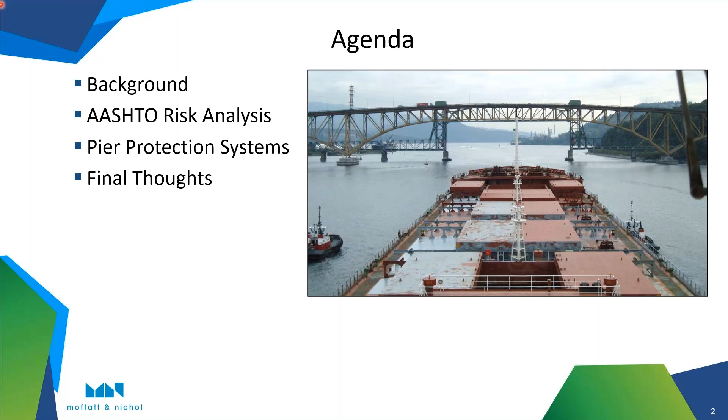Thank you very much, Mike Winters, and I appreciate the opportunity to speak to this group. Today we're going to give a basic overview of the AASHTO vessel collision risk analysis, but we're also going to spend some time talking about pier protection systems and the types of protection systems that might be appropriate. We'll look at some background of vessel collision, get a little into risk analysis, but not too deep, just to give an overview. We'll talk about pier protection systems, and then we have some final thoughts. This presentation has almost 40 slides, and we're not going to cover every slide in detail. Afterwards you can download a PDF of this presentation and look up things we won't have time to get into, but we do want to hit a few highlights.

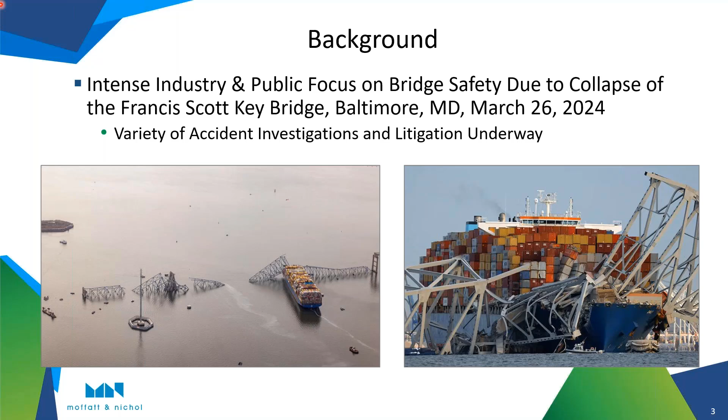The recent collapse of the Key Bridge in Baltimore has brought a lot of industry and public focus on bridge safety, and there are a variety of accident investigations and litigation underway. Accidents do happen, it's only a matter of time. I often say, if you build it, it will be hit. You put an object in the water, be it a bridge pier, a terminal port facility, or a pole, at some point in the lifetime of that structure, due to whatever circumstances, it's probably going to be hit. Bridge collapses have obvious consequences: people die, oil spills occur, political turmoil where people lose their jobs and governments can be turned around, major transportation disruptions, and large economic losses. The largest of these losses are usually the motorist inconvenience costs, where motorists have to take a detour for the years it takes to replace a bridge, and if you detour 50, 100,000 cars a day, that adds up. Of the collapses that have occurred since the early 1960s, about half of them are in the US.

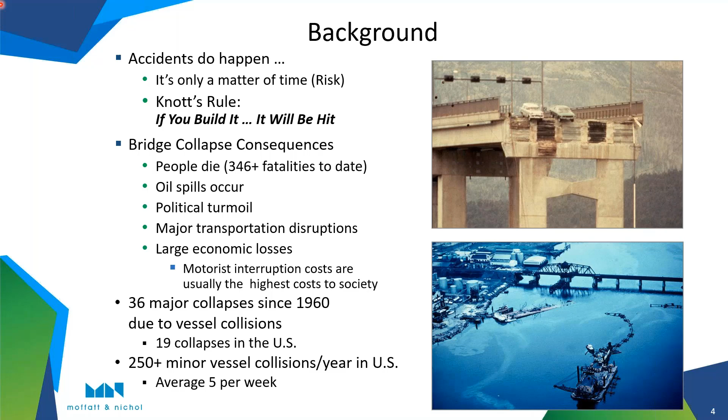Just to note that on average, we have about 5 collisions per week of a minor nature. They do some damage, but not significant, and not leading to collapse.

Why do vessels get in trouble? There's a variety of reasons. The highest reason is human or pilot error, depending on which statistics you follow, 60 to 85%. The things I list on this slide are not exhaustive; there are a bunch of factors. One is that most international vessels have international crews, and not all speak excellent English, so sometimes there can be misunderstandings between a local pilot and a command that's not quite understood.

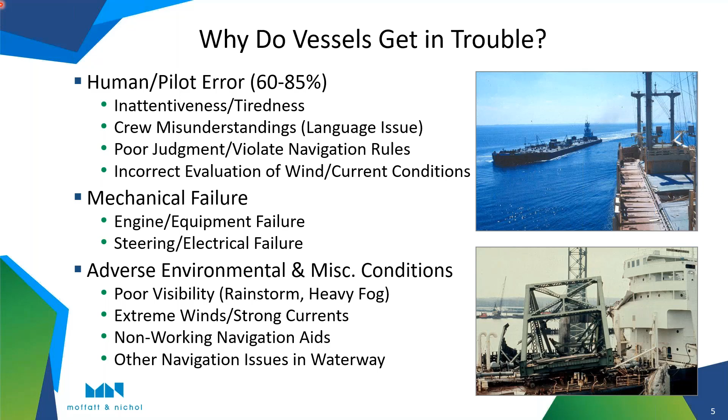There can be mechanical failure. This is obviously something that happened on the Key Bridge. In most circumstances, there tends to be some kind of adverse environmental component, like heavy fog, a rainstorm, or strong winds.

These collapses occur everywhere, on inland waterways and coastal waterways. Though we're talking maybe more with a focus on ships, we have many more bridges in our inland waterway system that are subject to barge impact, and we've had a number of bridges collapse due to barge collision. In the lower left of this slide is a railroad bridge where a barge hit it. A train passing a few moments later went into the river near Mobile, Alabama, and a number of people were killed.

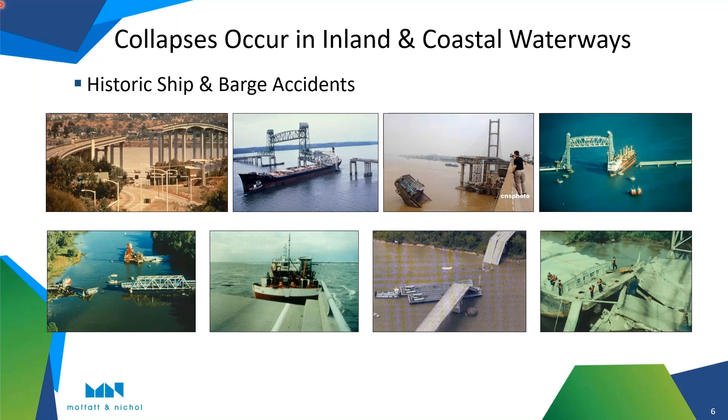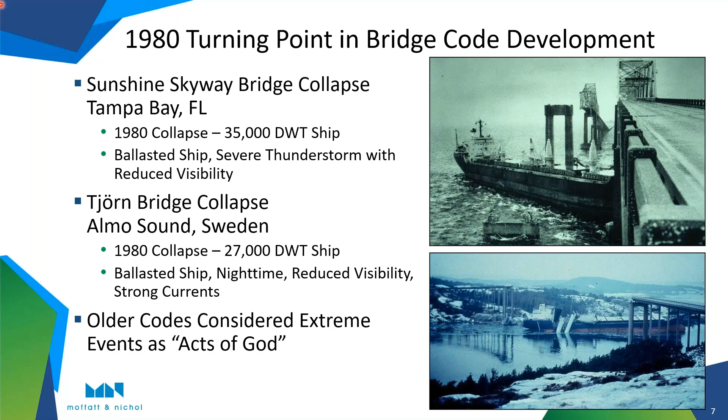Prior to the 80s, the older codes considered these extreme events as acts of God. In 1988, there was a pool fund research project sponsored by 11 states and the Federal Highway Administration. I had the great privilege of being the principal investigator of that study. It included consultants from Denmark, Ole Damgaard Larsen from COWI Consult; Professor Gerhard Woisin, a noted naval architect in Germany specialized in ship collision; and Dr. Fujii from Japan, along with some of the risk analysis work he was doing there.

The result of this research project was, in 1991, the adoption of the AASHTO Bridge Guide Specification for Vessel Collision. That code was used for 18 years, and then in 2009 a second edition was issued with some minor revisions and updates. The guide specification has since been superseded by the AASHTO Bridge Design Specifications, what I'll call the code itself. The guide specification had over 240 pages of vessel collision analysis and design information, background, and worked examples, and that was all condensed into 20 pages in the code. So if you just read the code, you'll have what I think of as a limited understanding of vessel collision. This second edition is really a critical reference when using and understanding the code provisions.

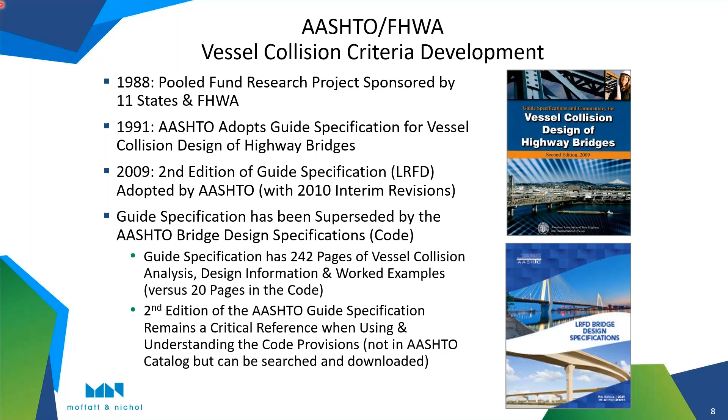AASHTO had moved it into their archives section but have recently brought it back out. It is available now in AASHTO publications. It's not in their catalog, but if you go to AASHTO publications online and search vessel collision, you can purchase the second edition of the guide specification.

A quick overview: this was the first time risk analysis was used to determine the design condition for bridges. We use the procedure to estimate the probability of bridge collapse, compare that to a standard, and then do something to bring the bridge into compliance with that standard. Part of the vessel collision risk analysis is we select a design vessel associated with each pier in the waterway. It could be a different design vessel as the piers are further away and in shallower water, and there could be a different design vessel inbound than outbound, which is sometimes the case for river situations.

For critical bridges, the risk of collapse is 1 in 10,000. For non-critical bridges, it's 1 in 1,000. This does not mean we expect bridges to last 10,000 years or 1,000 years, just that the risk of vessel collision and collapse of that bridge within its lifetime is vanishingly small. The code has some simplified examples of the principles of how to do vessel collision analysis, but these simplified situations are rarely real world. In the real world, we have curved navigation channels, side channels, and other geometries, so these basic principles need to be adapted for the local circumstance.

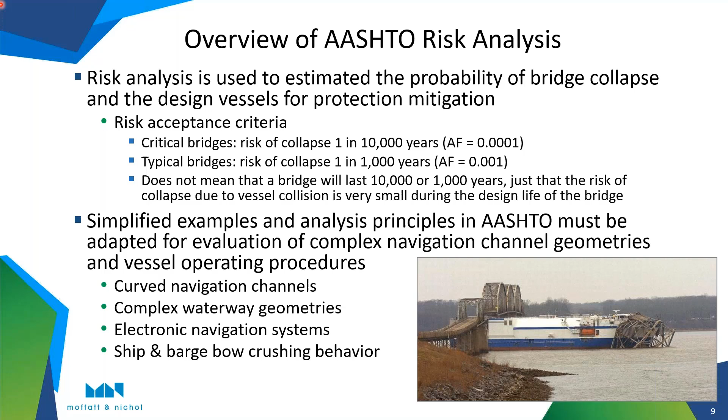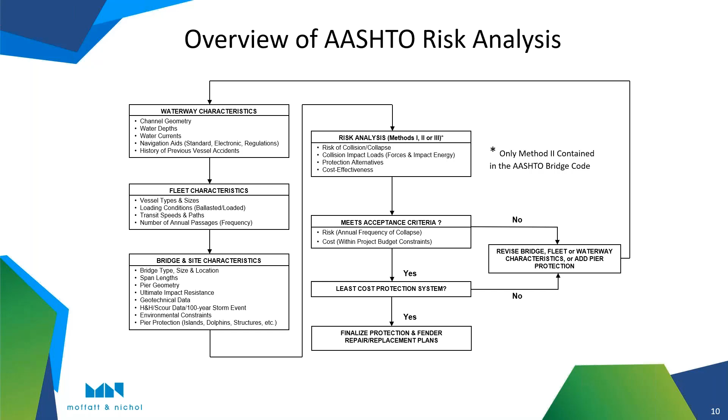This includes an accident base rate based on historical information. There's a geometric probability that says, well, if the vessel goes off course—is aberrant—where is it? This geometric probability is not the distribution of vessels that are in the channel. We'll talk about AIS here in a moment, which gives us information on the thousands of vessels transiting the channel, and one can do all kinds of statistical work on that information, but that gives you the vessels that are in the channel.

This geometric probability is about the rogue vessel—the one in fifty thousand transit vessel that's off course—and we're asking the question, where is it? That's what this geometric probability attempts to do.

We do a probability of collapse—so if the bridge is hit, will it collapse? Sometimes it's a minor collision and it won't. Sometimes it's a big collision and it will. There's a protection factor: are there things upstream, downstream, or protection structures to protect the bridge? We have to make estimates of what that is. And then there's a growth factor—are more or fewer vessels expected to transit this channel in the future? We typically take the analysis to the midlife of the bridge in question.

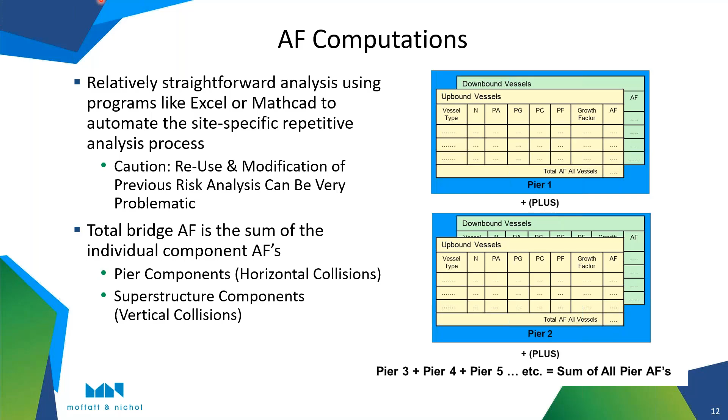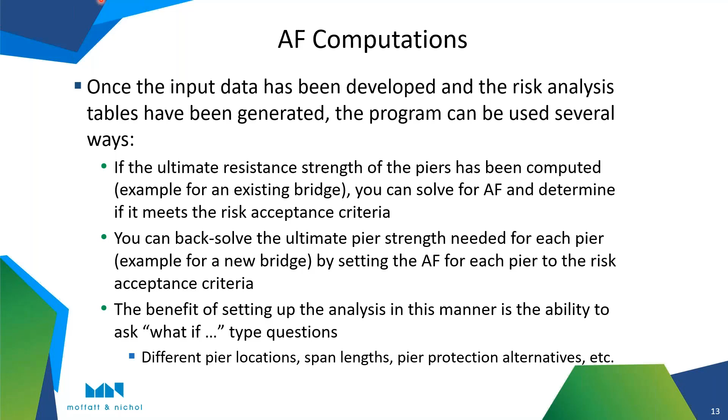The benefit of setting things up this way is that it allows us to do a lot of what-if scenarios, look at different pier locations, span lengths for new bridges, and what types of pier protection alternatives might work.

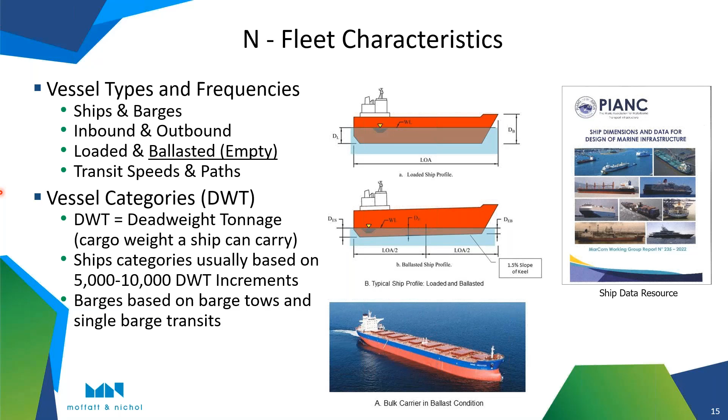Mike mentioned previously the AIS vessel tracking. AIS is automatic identification system data. All large commercial vessels are required to have this. It's downloadable information, but it does require some specialized post-processing software to work with.

Also going into the annual number of vessel trips, there are things we have to account for. Mike mentioned earlier about the equations that go into the annual frequency of collapse. One of those is the growth factor. It accounts for either an increase or a decrease in the annual number of vessel trips, and typically we'll transition this to the midlife of the bridge structure.

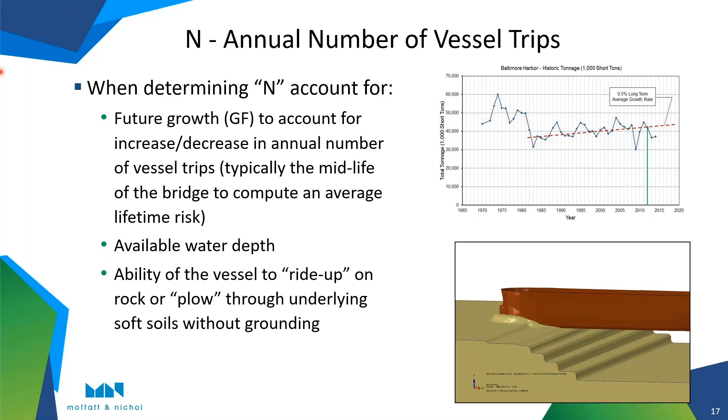Some of the other factors considered in the risk analysis for the annual frequency of collapse are the geometric probability and the probability of aberrancy. As Mike said, the code shows you what to do for very simplistic models of a bridge crossing a waterway at almost 90 degrees. This is obviously not a 90-degree crossing.

So the way we do this is we look at the vessel transit path. We've got the inbound and the outbound, but on the inbound side there was a severe curve. So what we did was break the curve up into legs, or tangent sections, and applied an individual risk to each one. What you're looking at here, the standard deviation, is the geometric probability for each one of these legs.

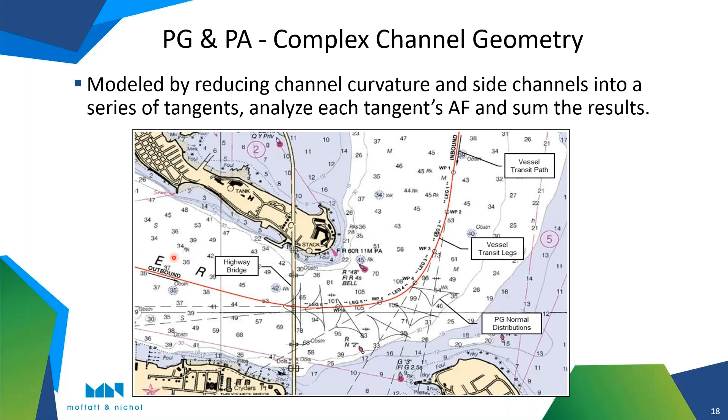One thing to note in the code: for the probability of aberrancy, Mike mentioned there is an aberrancy base rate. Just know that the base rate in the code is for a singular direction, meaning that same base rate applies to both inbound and outbound. It would be incorrect to take that base rate and divide it by 2, half for inbound and half for outbound.

The probability of aberrancy goes back quite a ways. The code was originally written in 1991, which means the data that went into developing it probably comes from the 70s and 80s. The aberrancy base rate used in the probability of aberrancy was based on one pilot on board, no other navigation restrictions, and no tug assistance.

So certainly with the advent of today's modern technology, adjustments to the base rate and modification factors to decrease it can be developed to account for the types of vessels and specific navigation channel requirements and restrictions, such as multiple pilots, tug assistance, and if tug assistance, multiple tugs, daytime travel restrictions, visibility restrictions, current restrictions, speed restrictions, among others.

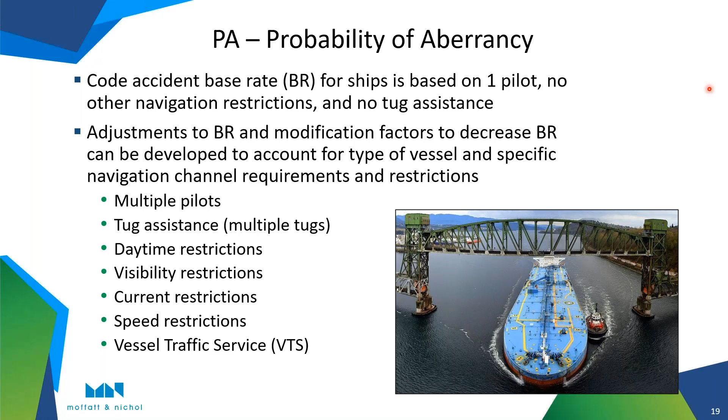One of the major components to both the impact loads and energies is the impact speed. The way we do that is we look at the actual vessel transit path. In this example, directly from the code, this is two-way traffic, so we're not considering the centerline of the channel. We actually have to consider the centerline of the vessel transit path.

What we start out with is VT, the transit speed in the channel that we've calculated. Once we get to the edge of the channel, there's a linear reduction in speed all the way out to 3 times the length of the vessel. So XL is 3 times LOA.

Once it gets to that point in time, we assume the vessel is basically just coasting in the water, so it's the speed of the waterway on which the vessel is traveling. Obviously each one of these curves is different for each vessel because they all have differing LOAs, so it's a different curve that needs to be included in the analysis.

The ideal situation, looking at this chart and knowing how speed impacts both force and energy, is a long span over a narrow channel, because it pushes your piers out into both shallower water and reduces the speed. The problem situation is when you have a small span over a wide channel, so you have piers located relatively close to the edge of the channel because the speed hasn't reduced at that point in time.

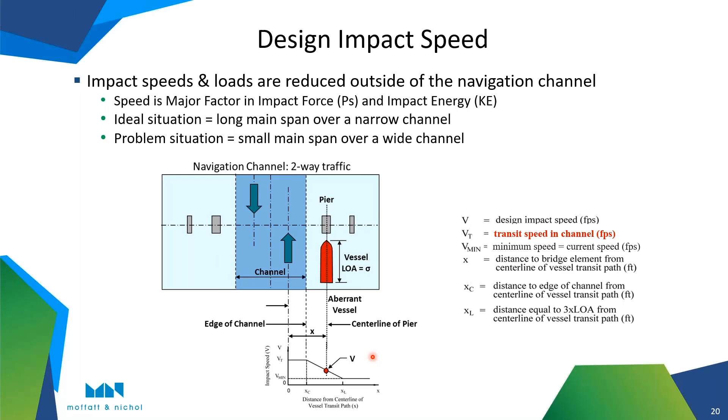The AASHTO impact load: now we've run our analysis, and from there we're able to determine what the impact force and impact energy are. It's important to note that you must consider both the force and the energy, not just a force applied to a bridge pier. I equate this to designing a beam that works for moment capacity and shear capacity, but then it deflects too much — you haven't accounted for all the code requirements.

So it's more than just determining a force and applying it to the bridge. You have to make sure the energy has been absorbed as well, because the ship is only stopped when the impact energy has been absorbed, either by the ship, the bridge, or the hydrodynamic mass of water. The energy is absorbed by moving that force through some distance.

If the bridge pier is a rigid vertical wall, then the energy is absorbed almost primarily by the vessel — there's crushing of the vessel. But if the vessel bow is only partially crushed and all the energy is not absorbed, then can the bridge pier move substantially without collapsing? Can it handle that load and the distance required to dissipate that energy?

For example, just an order of magnitude: for a 100,000 DWT ship impacting at 10 knots, which is not unreasonable at some coastal ports and bridges, the equivalent static force would be about 43,000 kips, and the impact energy is over 1 million kip feet. The bow crushing distance per the code, based on that same ship hitting a rigid wall, would be about 40 feet — so the bow of the vessel would crush 40 feet.

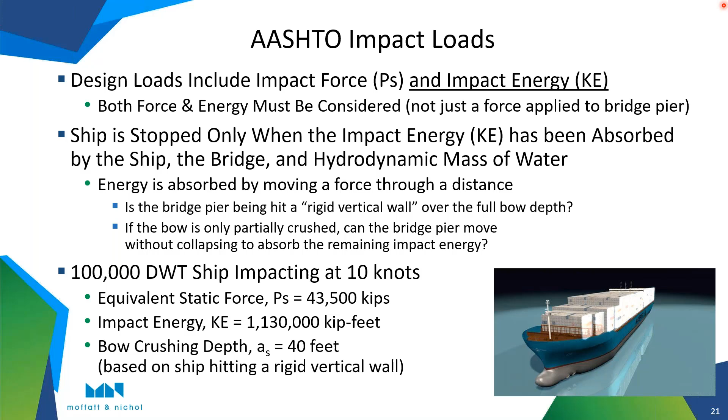The location of impact forces is critical.

We have to consider that the bridge design for vessel collision must account for the barge bow, the flare overhang up top, and anything protruding below. The barge can hang over a column footing and possibly contact a column.

Looking down in the lower left, this is a container ship. It's actually in a lock, but you can see this dramatic overhang of the bow, where that portion might hit before the bow itself would hit.

The middle picture shows a cruise ship where the bow could impact a column well before the bulbous bow portion would impact the pier below. And then we have the Francis Scott Key Bridge collapse shown here, where it appears that bow overhang had clipped the column and taken it down.

This is what happened at the Sunshine Skyway Bridge in Tampa, Florida in 1980. The bow overhang actually did clip the column and took out that approach span.

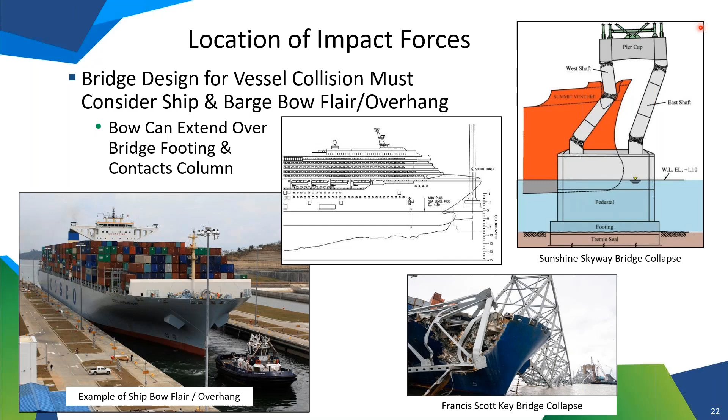Location of impact forces, continuing. The vessel collision must consider the bow shape, the overhang above the waterline contacting the column, the bulbous bow below contacting critical bridge piling or foundations, and the crushing of the bow and any crushing of sacrificial fender elements.

It affects the foundation geometry. What we're looking at in the bottom right is just an example of a bridge foundation with the support piles and then the columns.

This structure has an overhanging pier protection sacrificial element mounted to the pier foundation, and as the vessel collapses, it's actually able to take out the sacrificial piles.

But what you want to make sure you consider is that the impact energy absorbed and crushed by the vessel doesn't allow the bow to impact the critical support piles for the foundation. We also want to ensure there's sufficient overhang so the bow itself, the deck level, doesn't impact the column.

I've had questions in previous presentations about whether the ship really slices through like this, and the answer is yes. This was a container vessel that actually hit a port facility, and you can see where it crushed right through the edge of that deck, exactly as we're showing it.

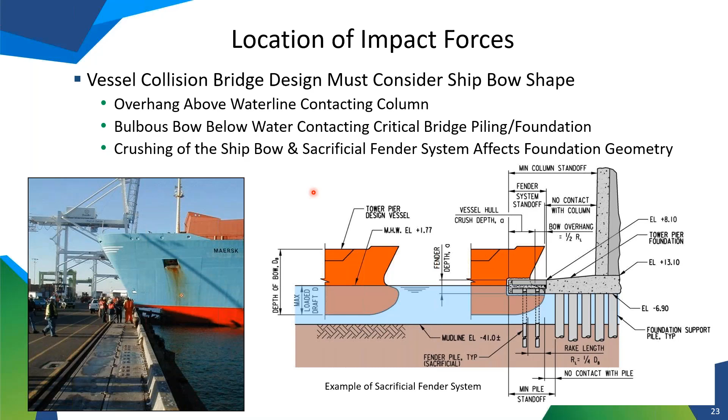Some of the things we can do involve finite element modeling of vessel impact. It's a complex problem, nonlinear dynamic modeling of both the impact and ship grounding. As such, we use an explicit solver FEM modeling for this.

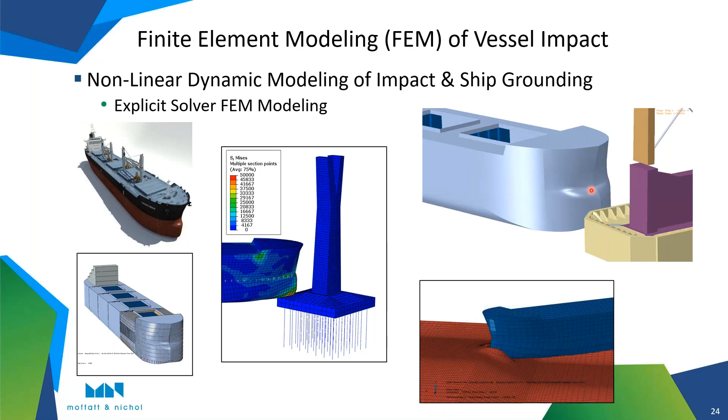Now I'm going to talk about a couple of typical pier protection alternatives. For bridges controlled by ship collision, we're typically looking at dolphin structures - large diameter steel sheet pile cellular cofferdams, typically a sacrificial element. We're also looking at protection islands and pile supported structures, which are typically sacrificial as well.

For bridges controlled by barge collision, we can design piers for impact forces, meaning you don't need anything in addition to the pier itself, since impact loads and energies are typically much less for barges than for ships, so the pier can be designed to handle that. We can also design fender systems both elastically and sacrificially, and dolphin structures as elastic and sacrificial.

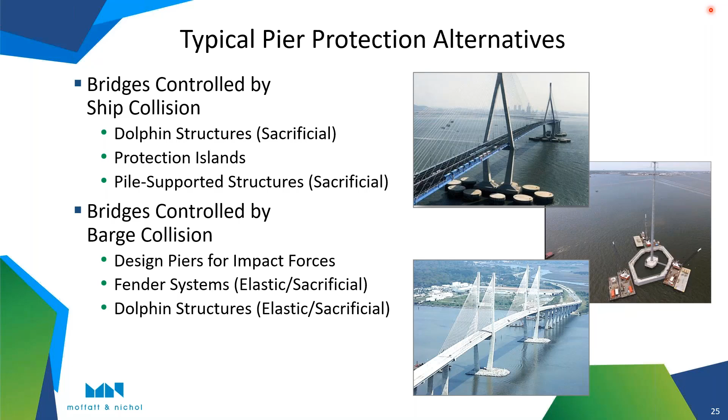For the dolphin structures, as mentioned, they're typically large diameter, 40 to 100 foot steel sheet pile cofferdams, heavily reinforced concrete caps, filled with sand or gravel. They're typically sacrificial - the kinetic energy is absorbed by the ship crushing, and then the dolphin partial and/or full collapse.

We're looking at a couple of examples here: the Dame Point Bridge in Florida, where we've got the dolphins on the approach, and the Incheon Bridge in South Korea, where it's surrounded completely by cellular coffer cells.

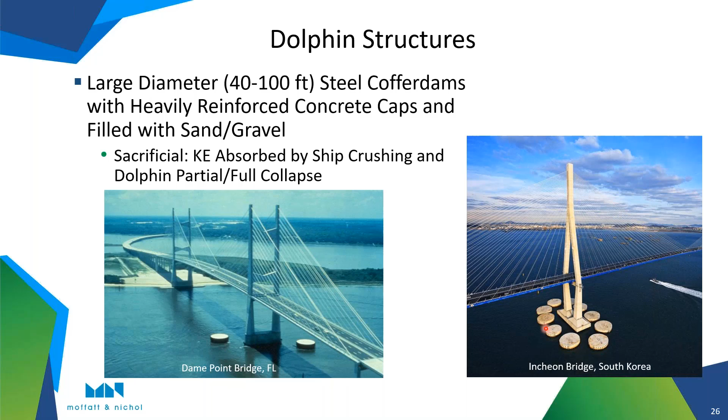For the dolphin structures, the impact energy is absorbed by either the crushing of the vessel bow, the lifting of the vessel bow, the friction between the vessel and the dolphin, the friction between the vessel and the bay bottom, sliding of the dolphin, rotation of the dolphin, and deformation of the dolphin.

This is something a lot of structural engineers find a little difficult to wrap their minds around. We're typically designing things in either the elastic or the plastic range, but the purpose of these dolphins is as a sacrificial element. So if they're hit by the design vessel doing the design speed, the intent is for them to be completely demolished, and they would need to be replaced after the incident. But certainly the replacement of a dolphin type structure is much less than the replacement of the bridge. Designing something to collapse and fail is sometimes a foreign concept for structural engineers. Ultimately, the structure needs to hold together for about 3 to 4 seconds.

How we do that is typically by putting a heavily reinforced concrete cap on top. One thing I do recommend is that the concrete cap have physical attachment, to make sure it's not just kind of sitting in and self-weighting in. I have seen examples where the original design had an embedment of the steel sheet piles up into the cap. However, the contractor found it would be difficult to build, so they asked if they could just build it inside of, and they did. Then when it was hit by a vessel, this large diameter, very thick concrete cap just basically flipped out onto the sand bottom of the waterway floor there.

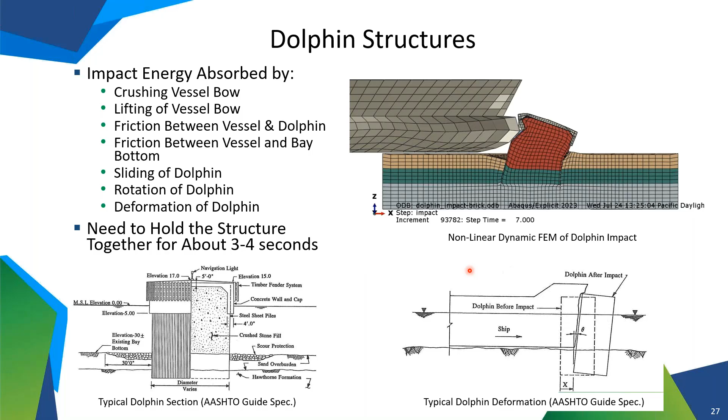The next to discuss is island protection. Island protection would be considered the best protection when it's environmentally feasible. The problem with this type of measure is that, especially in U.S. waterways, islands typically cover a large area of waterway bottom, and that can become a problem with environmental permitting. So they do operate the best, but the environmental permits to obtain can certainly be a challenge.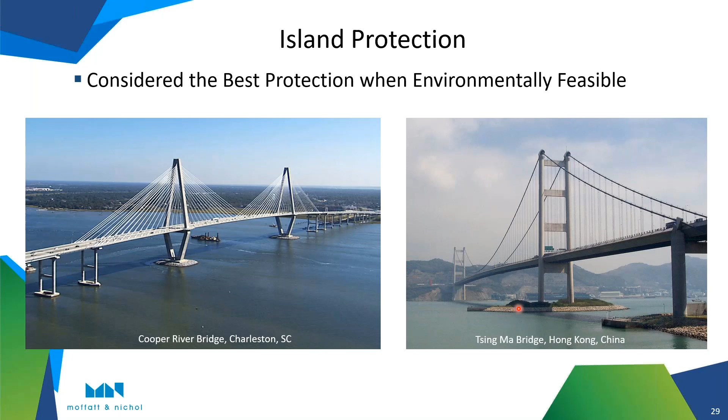For the island protection, the impact energy is absorbed by the grounding of the vessel. Once again, you have the lifting of the vessel's center of gravity. You can have crushing of the vessel hull, although it's usually minimized. There is a generation of water waves and turbulence and hydrodynamic mass movement. There's displacement, shear, compaction, and crushing of the island material. So it does damage, and there are usually generations of shock waves in the islands that can be transposed onto the pier foundations. The islands do the least amount of damage to the vessel, and as such, they have minimal risk of oil spills. So they can be more environmentally friendly on that side of the equation, and they're usually easily repaired after an impact or grounding.

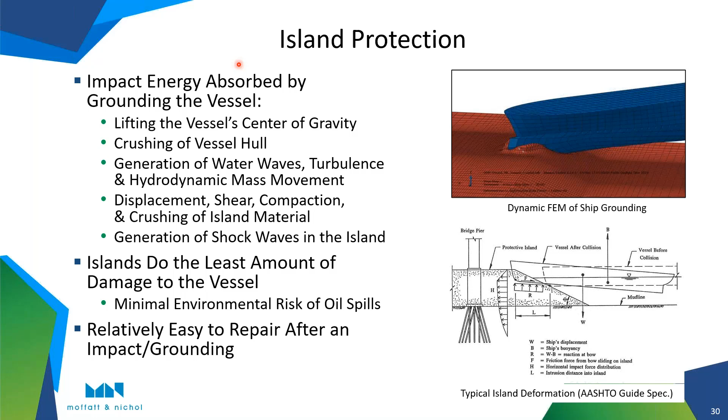For those that have ever driven down a large highway through the mountains and have seen the runaway truck ramps, I typically liken an island to that type of philosophy. You're trying to create something that's going to be somewhat of a softer impact.

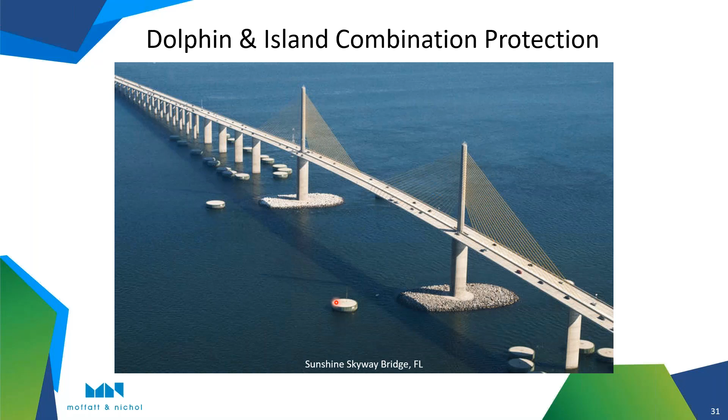You can actually do a combination of different types of structures. You can have dolphin and island combinations. Here's the Sunshine Skyway Bridge in Tampa, Florida, which has both the cellular coffer cells and an island. An interesting story about this bridge is that the day the replacement bridge opened, there was a fishing trawler that actually hit one of these and sank a few minutes later. Turned out that both the captain and his crew were in back tending lines, and they had the vessel on autopilot, but it was hit almost immediately after - small vessel, but hit immediately after being put in service.

The last type is the pile supported type structure. These can be done in two ways. What's shown here on this bridge in Argentina is actually a separate type structure - it's separated, a pile supported structure that's separated from the bridge pier.

If the bridge pier is substantial enough and can handle the lateral loads, you could certainly mount it to the bridge pier, although it's less desirable because there's a lot more geometry involved, making sure that the deck and the bow do not contact critical members of the bridge.

You'll note that on this bridge there are larger structures on one side versus the other. This is because it's on a river, and the river currents flow in one direction only. So vessels transit faster in that direction than they do going against the current, hence the difference in size of the two types of structures.

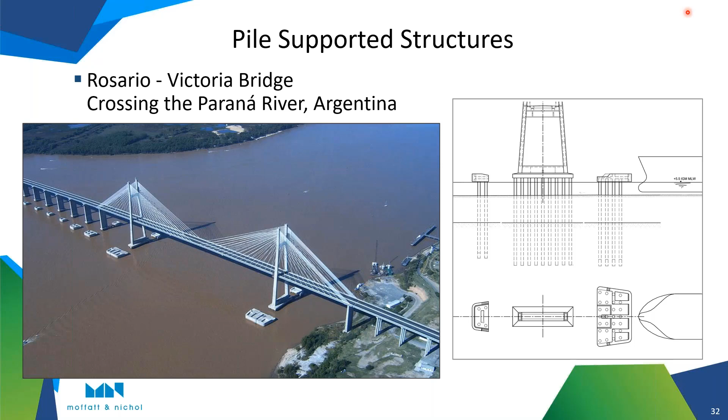This is a pile supported structure, actually right adjacent to the Francis Scott Key. Mike and I worked on the vessel collision risk analysis for this. It's the BG&E 230 kV crossing, a high tension power line crossing. It had a 2,200 foot main span, and was designed with a sacrificial pile support ring, put in place to crush if something were to go awry, protecting the foundation structure for the towers themselves.

With the 2,200 foot main span, we were able to locate the piers in shallower water depths versus the dredge channel, and through finite element analysis we determined a lot of the larger ships would run aground before they were able to make contact.

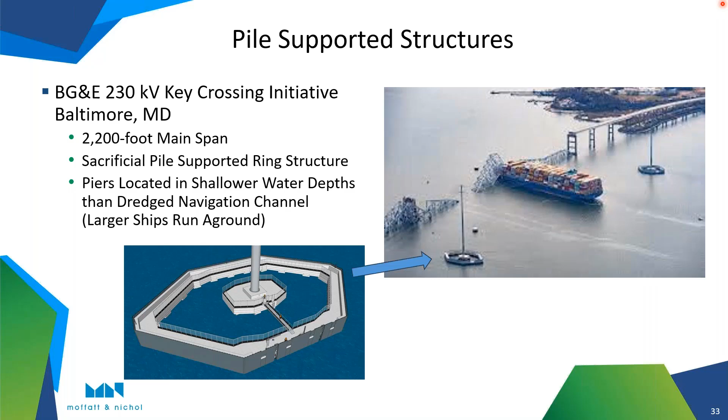There are also operational measures that can be instilled to reduce the risk of collision. Navigation is regulated by federal agencies, both the U.S. Coast Guard for coastal waterways and international commerce, and the U.S. Army Corps of Engineers for inland waterways and domestic commerce. Bridge owners cannot impose navigation or operational requirements in the waterway without federal approval and input from maritime users and organizations. We can look into measures, but there's a process that has to go through to get them implemented. The operational measures include bridge-mounted surveillance devices to monitor vessel transits.

A lot of this has actually been in use on many bridges in the U.S.: pilot master emergency communications with police and bridge operators to shut down highway and rail traffic. We saw that implemented during the Key Bridge incident, when they were able to radio the proper authorities and shut the bridge down to traffic for a situation that could have been much, much worse.

You can establish a U.S. Coast Guard restricted navigation area near the bridge, and implement speed, visibility, and water current restrictions for vessel transits.

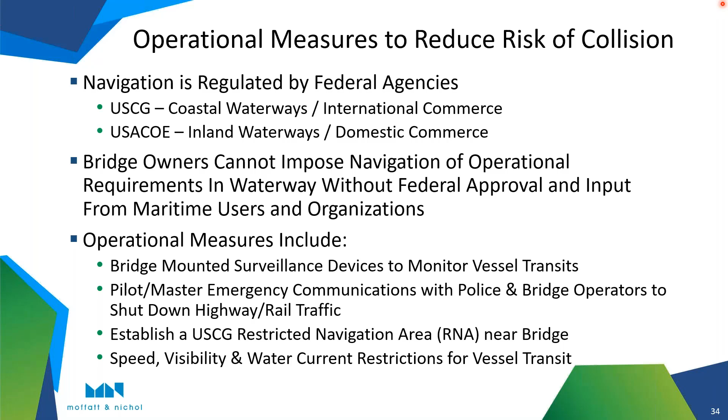These operational measures, a lot of times, need to be verified for their impact on the actual maneuverability of the vessel. We use ship simulators to evaluate vessel operation and navigation alternatives as part of the whole comprehensive bridge protection system. For instance, if we have a speed restriction, we want to make sure it doesn't impede the maneuverability of the vessel, because then we've created more of a problem than before. This is an actual image of a pilot in a simulator piloting a ship, making sure the restrictions we've implemented do not cause these issues.

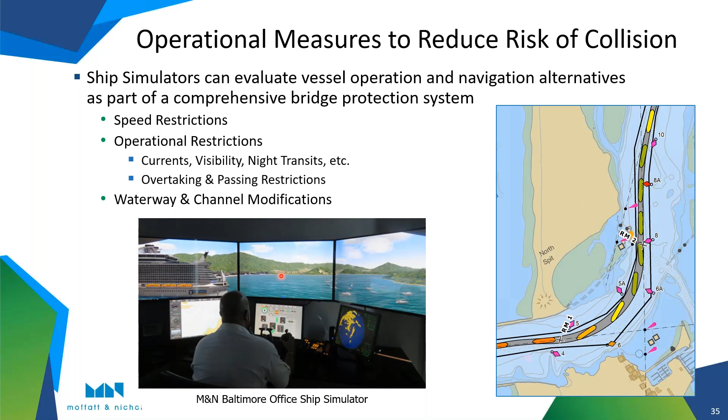The second edition of the Vessel Collision Guide Specification did have some planning guidelines. Some are just rules of thumb, but very good ones: bridges with main spans less than 2 to 3 times the design vessel length are particularly vulnerable to vessel collision. So if the vessel length is 1,200 feet, fairly standard for larger container ships, the main span should exceed 2,400 to 3,600 feet. This is obviously for planning new bridge construction.

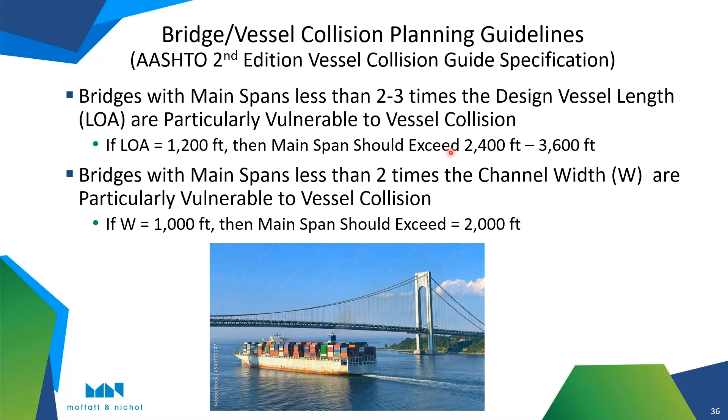Similarly, bridges with main spans less than 2 times the channel width are particularly vulnerable to vessel collision. So if the channel width were 1,000 feet, then the main span should exceed 2,000 feet in this example.

Some final thoughts: bridges are obstructions to marine navigation, and mariners have the right of way, not the motorist. Bridges must provide for the reasonable needs of navigation. Bridges are permitted to be built as obstructions to navigation by the U.S. Coast Guard, and as such must be maintained in accordance with U.S. Coast Guard permits. Of particular note, when there's typically a collision, a mass collision incident, these things are handled in what's called an admiralty court.

In admiralty court, if the bridge or the vessel owner can prove that the bridge was not maintained in accordance with the permits, they can actually sue the bridge owner for failing to do so. And it's happened in the past where the bridge owner is actually responsible for the damage done to the vessel from collapsing a structure. So it can happen.

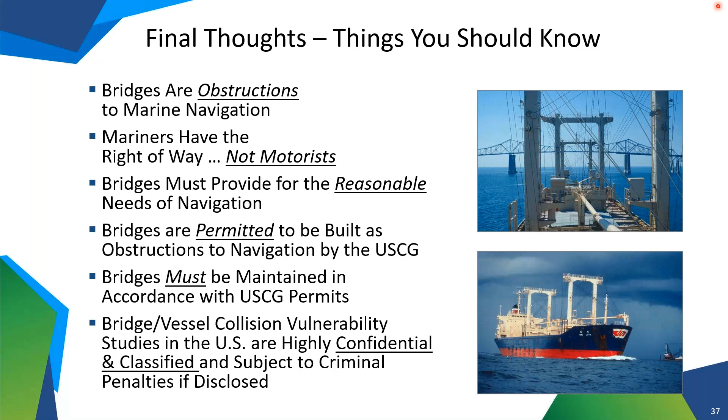The other thing to consider is that bridge and vessel collision vulnerability studies in the US are typically highly confidential and classified. They do point out weak points in the infrastructure, and especially with terrorist considerations, that's why some of this information is highly confidential.

Some vessel collision resources: as Mike mentioned, we have the second edition of the Vessel Collision Design of Highway Bridges. There's also a document done by PIANC, an international document. I'm the principal U.S. representative for a re-edit of this document. This one was done in 2001, but we're doing it under Working Group 215 right now, so looking to come out within the next year, the update to this should happen.

Another useful resource is called the Green Book. It's the IABSE document, dates back to 1993, so they're looking at an update to that. Mike Knott and I have both been asked to be a part of that code or document update.

And then there's another one, the proceedings of a ship collision analysis symposium that was held back in the early 2000s. One of the things to note here is whether the AASHTO Vessel Collision Guide Specification should be updated. And I've stood on a soapbox and said absolutely. The document was updated certainly in 2009, but those were basically transitions to the LRFD code.

So it dates back to the original 1991 publication, of which the data that went into that was from the 70s and 80s. There's been a lot of new information that's out there, a lot of new procedures, and it would do well, especially given the nature of this being on the front burner, to look at doing a re-edit of this code.

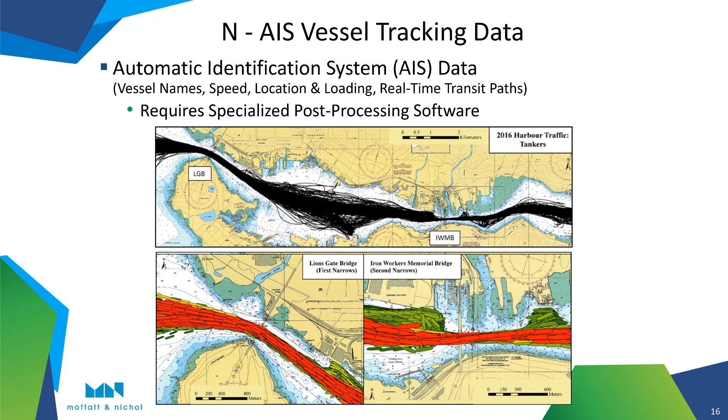That rate in the code can be increased. So if your bridge is near a turn, depending upon how steep that turn is, you apply a factor that increases the rate. If your bridge is located in an area of high currents, particularly cross currents that would push the vessel sideways, depending upon the value of those currents, the rate also goes up. If you're in a waterway where there's a lot of transits, with vessels routinely passing and overtaking each other, particularly in the vicinity of a bridge, there are yet more factors to increase the rate.

Now, what the code doesn't include is things that can decrease the rate. That's where, since the code was written, we have portable navigation devices like GPS that pilots carry on board in their pocket. Some waterways have certain navigation restrictions that can be looked into to reduce the rate, and should be, but it comes down to some engineering judgment, and these decisions need to be made in consultation with the owner.

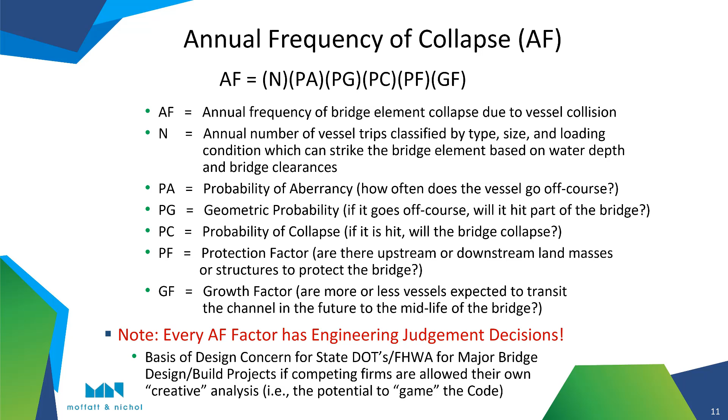So at the end of the day, having a base rate based on real accident data, which the code did, I think is an appropriate way to do it.